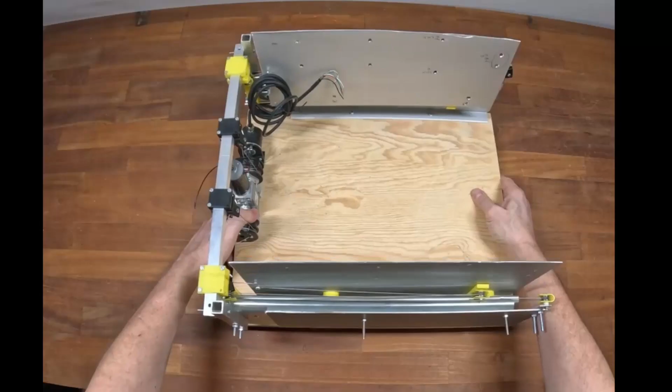Time for turning the cart, and some of my thoughts on the space needed to turn the cart from left to center to right, and the needed reach of the arms to get behind the box on the shelf. But first, some progress on an unrelated sub-project.

The actual reason was I had all the elements for the shelves and wanted to assemble them and start using the shelf prematurely, hence all the other stuff not in boxes. Unfortunately, the shelf width is not wide enough for 3 boxes and too wide for 2 boxes, so at some time in the future, a new shelf is needed.

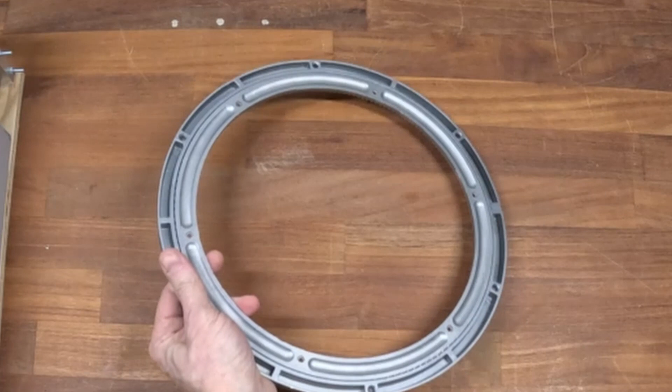Back to the assembly. The bearing ring that makes it possible for the cart add-on to turn. The cart, in a rather rudimentary state, but it works for this show and tell. Finding the center of the cart. Mounting the bearing for turning centered on the cart, aligning with the center crossing lines. The cart must be able to spin 180 degrees to on and off load boxes on both sides.

All my 40 centimeter shelves are put to use in the assembled shelf, so for this demo I use two 30 centimeters bolted together. To give you an idea of the 40 centimeter size, the reach the arms need is still quite some distance from the front of the cart, bridging the gap between the cart and reaching all the way behind the box on the shelf.

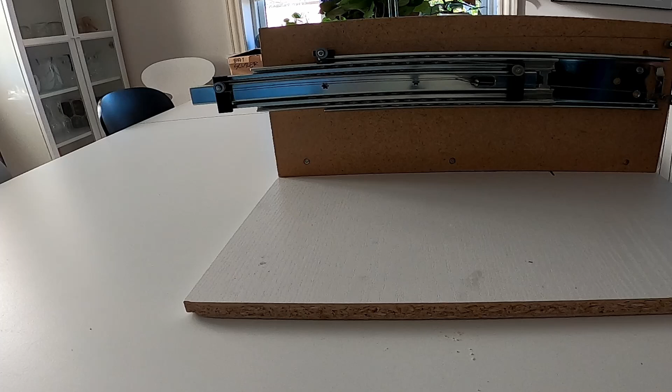My first experiment just before getting the overextension motorized. I'm still working on how to detect when the arm is all the way back, I guess via a switch. And then I have to detect when the arm is extended all the way. If I can get my reading of the rotary encoder to work, that should be the most reliable way.

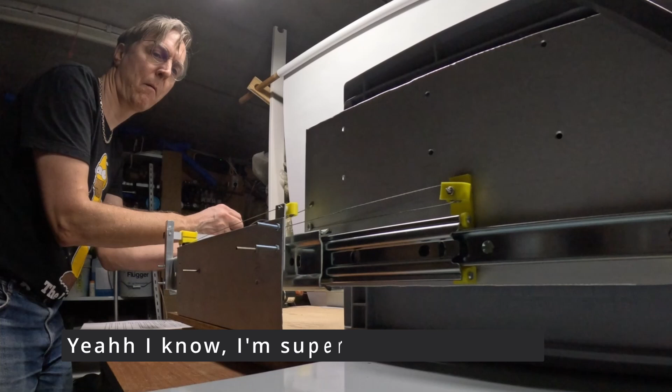This is how I pictured the delivery of the box to the shelf will work, pushing the box into the shelf. To demo, I need to supply power for the motor, extra power it is. Happy I could plan my own workspace and add the things needed for future usage, like a plug in the ceiling.

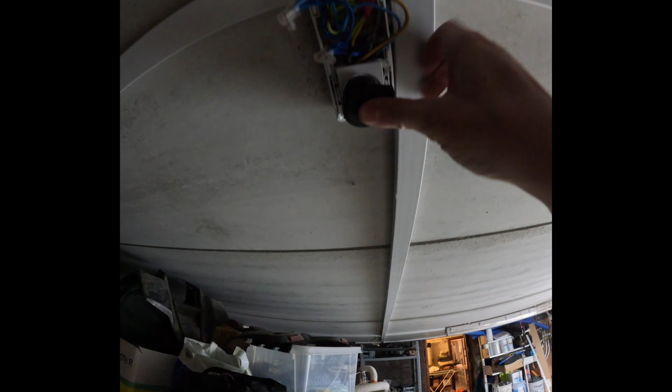When delivering a box, the cart is higher than the shelf, so the box clears the edge of the shelf and slides onto the shelf without hitting the shelf. When retrieving the box, the cart is lower than the shelf, and the box is pulled into the cart without hitting the cart.

This demo rig has the arms quite close. This does not leave a lot of room for misalignment with the box and shelves. Alignment and misalignment is an area I will touch on at a later time. In my mind, this is coupled to up and down movement, combined with the left and right movement. So more on that later.

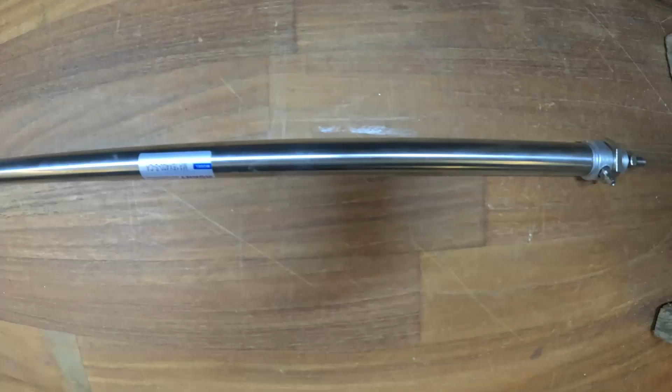Some of my subscribers have asked why I'm not using actuators. And yes, that was in my thoughts for quite some time. But the reach of the arm was an issue I could not solve. I bought an actuator to test the use and it runs on air, but electrical actuators are also available. This actuator is long enough to extend the length of the box. That will get me almost halfway. Unfortunately, I cannot show you this, as the actuator is lying somewhere I cannot remember.

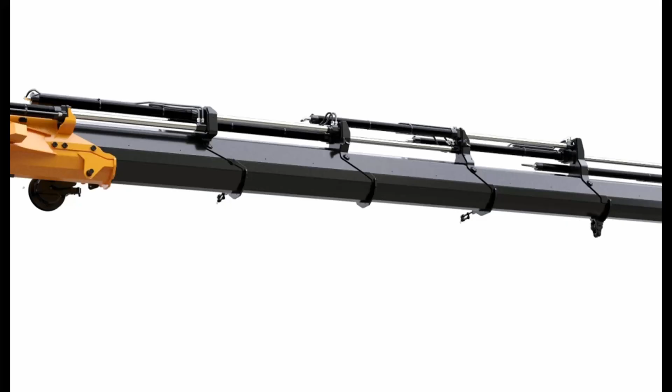The multiple actuators require at least 2 and probably 3 actuators to reach as far as the arm has to go. I could do something like a crane arm and probably make it with electrical actuators. But the overextending arm with wires to pull it back and forth is my choice at the moment.